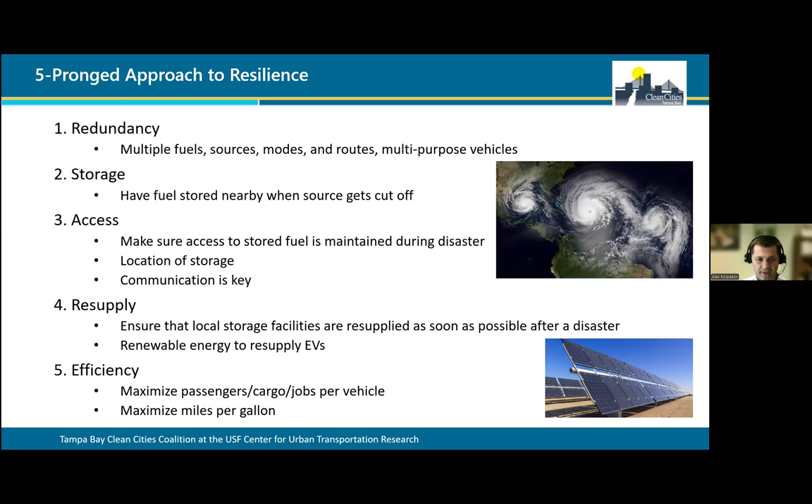And efficiency is when there is a shortage of fuel, you need to make sure that you maximize either the passengers or cargo per vehicle and maximize miles per gallon. So essentially, you try to use the fuel in the most efficient way when it's in short supply.

Now, this is a graphic representation of fuel supply chain for different types of fuel from production to the end user. So for example, for petroleum fuels, oil is extracted out of the well, then it's sent through a pipeline to a refinery, then it goes through a port on a tanker ship, then it's loaded into a pipeline or stored at a terminal at the port, and it's then delivered to retail stations by tanker trucks. So you can see that there are other types of fuels that can take different, sometimes much shorter delivery routes.

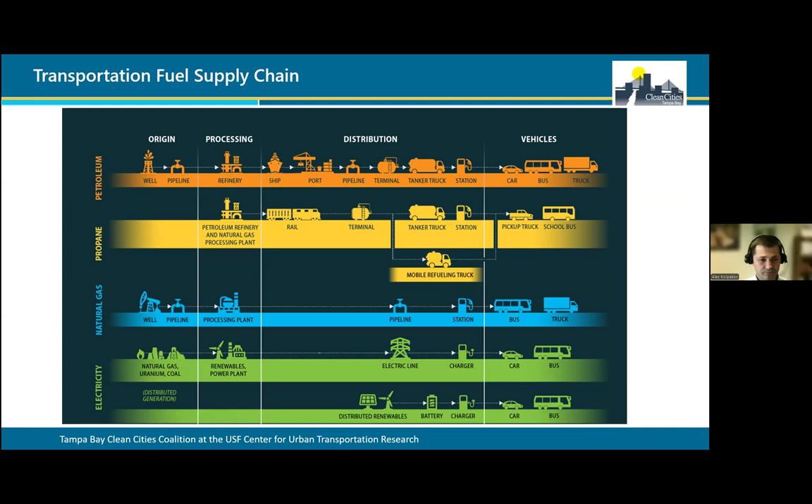Now, to expand a little bit about the different fuel types having different delivery methods, specifically in the case of Florida, all petroleum fuels, gasoline and diesel that comes to Florida is delivered to the state through Florida ports. Natural gas, on the other hand, is transported through a pipeline that can run above or underground. So one example is a Gulf Stream natural gas pipeline that runs under the Gulf of Mexico to supply Florida with natural gas from Alabama and Mississippi.

So natural gas supply chain is relatively free of choke points due to some redundancy in the system and due to the fact that it's not reliant on the port infrastructure. So there are usually multiple compressors that service the pipeline. In most cases, it's up to 4 compressors. So even the loss of one compressor will not reduce the fuel dramatically. It can only reduce the supply by about 25%.

Now, if you look at propane, propane is delivered to Florida by rail. It comes from usually Pennsylvania, West Virginia, Ohio. So one thing that makes propane unique and favorable emergency fuel is that it can be stored indefinitely. So unlike diesel and gasoline, it does not degrade when you store it. So with diesel and gas, you always have to turn it around, otherwise it goes bad. And propane tanks can be filled and stored for a very long time with little or no maintenance, and you can use it whenever you need it.

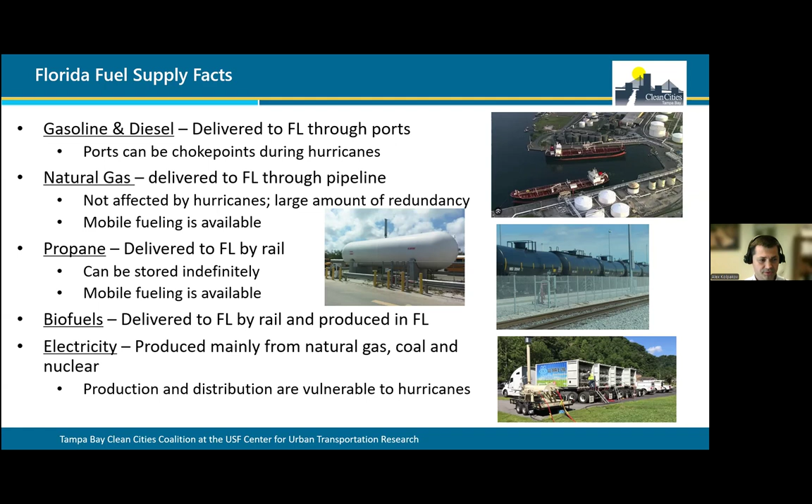Now, in this presentation, I'll mention some of the findings from the previous studies related to fuel resilience that Tampa Bay Clean Cities Coalition and CUTR was involved in. One was Tampa Resilience Study that was completed in 2020, and we looked at the role that alternative fuels can play in improving the resilience in the Tampa Bay area. So the goal was to collect and report data on fuel management and resilience activities related to disaster planning in Tampa Bay, investigate best practices and case studies of using alternative fuels, evaluate some vulnerabilities of critical facilities, and also identify the areas of improvement.

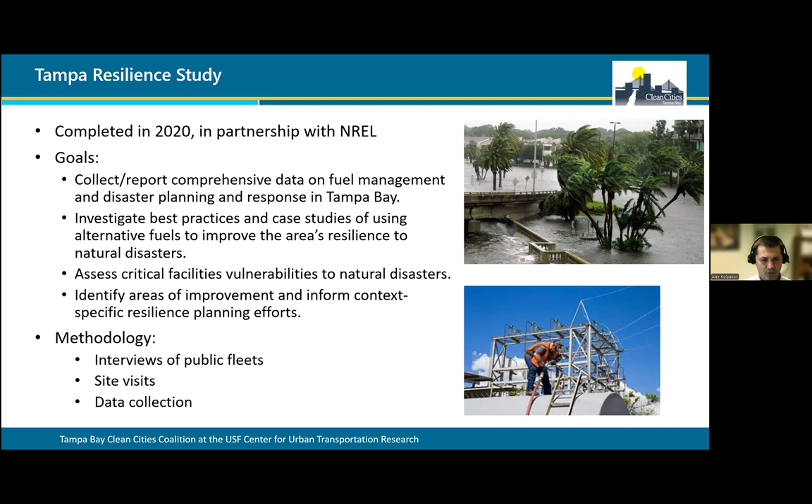So the way we approached it, we relied on multiple sources of data collection. We've interviewed public and private fleets in the area regarding their resilience practices. We conducted some site visits and also collected data on fuel shortage during Hurricane Irma, which was in 2017, and also the data on power outages during that hurricane from the local utility company.

So here are some of the major findings and best practices that we found from Tampa Bay. One is that ports can be choke points during hurricanes, particularly the Port of Tampa Bay is really vulnerable. That results from the whole configuration of the port and the waterways that lead to it. There is a 43-mile channel that leads to the port, and it requires approximately 4 hours for the ships to cover the distance. So that channel is relatively narrow and can accommodate only one-way traffic for mid-sized or large cargo ships. So due to the complexity of that port channel, large cargo ships are guided through the channel by local pilots.

And in case of poor weather, whether the hurricane is approaching or you have other high waves or just fog, pilots suspend the service and ships are not able to enter or exit the port. And the reason why the Port of Tampa is significant is because approximately 45% of all Florida gasoline comes through Port Tampa Bay.

Now, the second finding is that timing is critical to determine when normal operations should be suspended to prepare the fleet for hurricane impact. And this planning should be done every year to ensure coordination with local and state emergency guidelines. Now, asset staging, which essentially is relocating vehicles to higher elevation areas pre-landfall, is a key step in hurricane preparedness, and we found out that a lot of critical fleets are doing that.

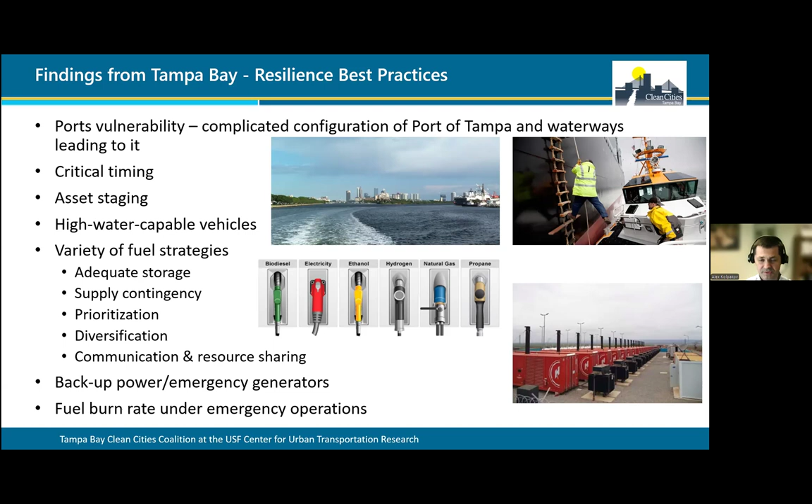Now, investing in emergency generators, including the generators that are powered by alternative fuels, is another important strategy. And finally, one thing that we've noticed is that accurately predicting the fuel burn rate under emergency operations is challenging. It turns out that fleets can consume up to 2 to 3 times more fuel during emergency operations than the normal operations, and it's important to be able to determine that fuel burn rate as accurately as possible. And sometimes it's not very easy.

Now, here are some of the results of data analysis regarding fuel shortages during Hurricane Irma in 2017 that we've done. The graph on the left shows the results of panic buying before the hurricane. You can see that 80% of stations were out of gas and 55% of stations were out of diesel 2 to 3 days even before the hurricane hit the state. We saw a similar situation before Hurricane Milton. In fact, about a day before the hurricane, most of the stations in Tampa Bay were out of gas, so it was not possible to purchase any gas.

After Hurricane Irma, half of Tampa Bay gas stations did not have fuel, and what we've also noticed is that diesel was more available before and during the hurricane compared to gasoline. But at the same time, after the hurricane landfall, diesel availability dropped significantly. It's not clear exactly what caused that. There could be two possibilities. One is that diesel could be the fuel of choice for recovery, so that's why it was in high demand right after the hurricane, or that maybe diesel supply was compromised. Again, we don't have enough data to determine what caused that.

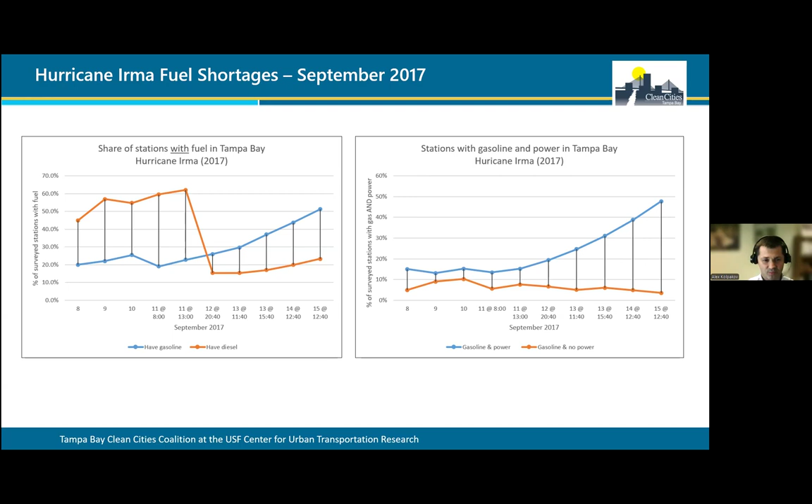The graph on the right shows the combination of fuel availability and power, because you need power to dispense fuel. And one interesting thing is that about 5 to 10% of stations had gas, but there was no power to dispense fuel. So essentially, whatever gas they had, it was useless because they could not use it. So this emphasizes the importance of having both fuel and power to ensure uninterrupted fueling.

Now, power outages create significant challenges for transit agencies with large battery electric buses. So while that large battery on the bus can be used to provide exportable power, and there are such technologies that allow that, the inability to charge the bus for a long time can result in a stranded asset, and that can be a problem. Backup generators usually are not capable of supporting the practical charging of battery electric buses. They can help with fueling the diesel buses, but not the battery electric ones.

Solar power is a possibility to have as a backup, but it usually requires a very large footprint and is often not independent of the grid. So if the grid is down, solar often cannot supply power directly to the customer. There are exceptions to that, and I'll talk about that a little later.

Some of the potential solutions to overcome those challenges is have fuel diversification, have different types of vehicles: electric, diesel, CNG, hybrid buses. Then one other thing that we've noticed is that some customers had multiple connections to the grid, or they would be located on different circuits.

So this may not be feasible for smaller customers, but we've seen cases for some larger customers like transit agencies where their transit facility would be wired by 2 or more circuits. So if one circuit is down, only part of the campus is out of power. In fact, I believe that JTA facility in Jacksonville is powered exactly the same way. They are on 2 circuits.

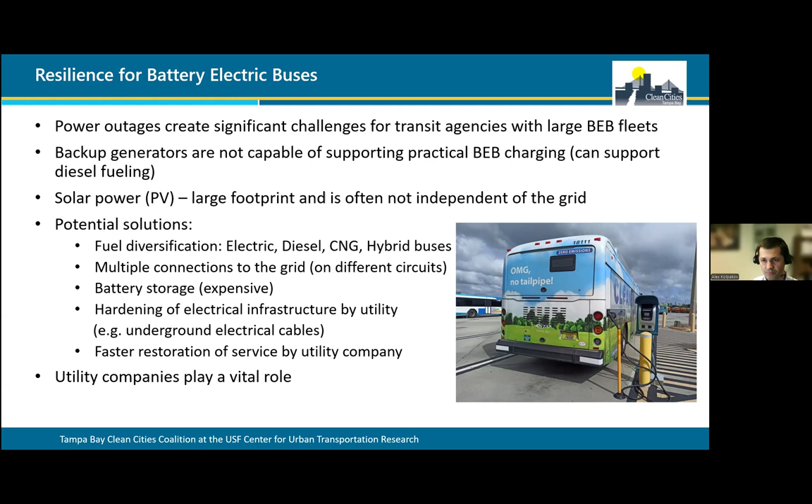Now, building on the experience with resilience at the local level, we've partnered with the Florida Energy Office, National Renewable Energy Lab, as well as the University of Central Florida in developing a state resilience plan. So the primary goal was to integrate alternative fuels into resilience planning practices in the state to improve the state's preparedness for hurricanes and other natural disasters. So this project was completed and published by NREL in December of 2022. So I'm going to go over quickly some of the findings.

So some of the lessons learned is that the propane and CNG supplies were not interrupted during past hurricanes, unlike diesel and gasoline. And while diesel and gasoline was not available from the ports due to port closures, propane and CNG remained available. We've seen cases where propane buses were involved in recovery efforts. They were delivering supplies and helping with evacuations. Some of the CNG users, such as City Furniture, sent their CNG vehicles to help with cleanups after the hurricane and also provided compressed natural gas to local municipalities that needed it. So that's the case of where the alternative fuel helped with recovery right after the hurricane.

One other thing that we would like to emphasize is the need to educate the first responders about alternative fuel vehicles and how to handle them. There was one example in Broward County, which was not necessarily related to hurricane, but still emphasizes that need for educating the first responders, where the propane bus caught fire due to an electrical issue, and the bus was parked in the bus yard. The fire department was on the scene very fast, but since it was a propane bus, the first responders did not know how to handle it, so they let it burn to the ground.

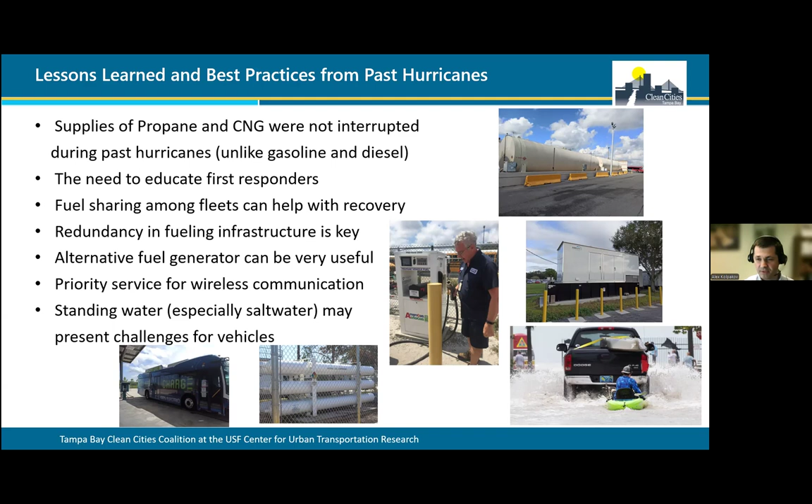One of the issues during emergencies is to ensure that there is enough fuel along the route when you want to ensure that the evacuation is available. There were multiple cases in the past when vehicles stuck in traffic during evacuation ran out of fuel, gasoline or diesel. But evacuation may be an especially difficult task for EVs given the limited range of the vehicles, fewer charging locations than gasoline, and also longer refueling time.

So as part of the Florida statewide resilience project, USF developed and tested the EV evacuation planning web tool. The goal was to assist in developing an optimal evacuation plan for EVs to avoid charging congestion. In that tool, the user provides the initial range or state of charge of the vehicle, the battery size, origin and destination, and preferred departure window.

And the backend algorithm determines what time to start the trip, what route to take, and where to charge on the way. That algorithm attempts to balance EV charging demand and supply by reserving charging time and EV charging capacity throughout the evacuation route. This is a prototype tool to demonstrate the feasibility of optimally scheduling long-distance EV evacuation in the case of an emergency. It was based on multiple assumptions, of course, but the idea was to demonstrate that it's feasible to do.

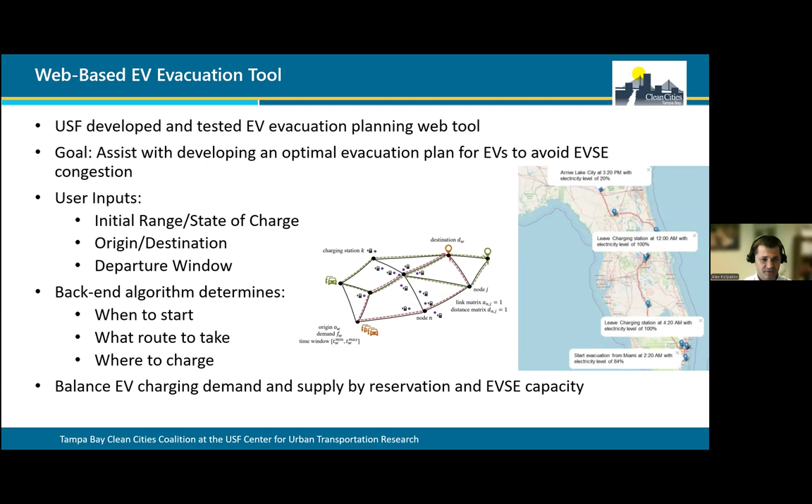Finally, I want to finish with some of the highlights from one of the recent hurricanes, Hurricane Ian, which was in 2022. That was the last one that we have complete data on. During that hurricane, the natural gas infrastructure in Florida was not compromised. There was little interruption to natural gas pipelines. Interestingly, there was a lot of flooding in some areas, but even some of the facilities that were flooded continued operating on natural gas. There was a case in Fort Myers where one facility got flooded, but the CNG meters continued operating, even fully submerged in water.

While natural gas supply was not compromised during Hurricane Ian, natural gas demand fell significantly. Natural gas is mainly used for power generation in Florida, not as transportation fuel. More than 2 million electric customers faced blackouts after Ian, and as a result, natural gas generation in Florida fell by almost 42%. That caused the decrease in natural gas demand.

Most damage during Ian occurred due to flooding, not wind. Carfax estimated that over 350,000 cars were damaged by Ian, mostly by flooding. There were 21 notable cases of EV battery fires in the aftermath of Ian, which I'm sure a lot of you heard in the national news. There was one case when a flooded EV caught fire in the garage and burned down the house. In fact, there was a similar case in Tampa after the recent Hurricane Helene, exactly the same, where the electric vehicle caught fire and set the house on fire.

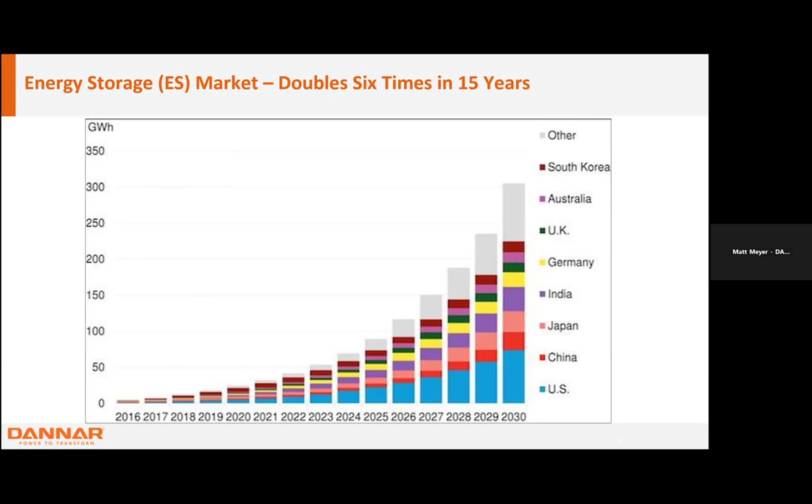Just a quick snapshot of where the energy storage market is. We all know this is a big market. It's a growing market, but when you see it displayed like this, I think it really can help us understand just what this market is. The energy storage market really is a derivative of this alternative energy buildup that we've been already in the midst of. And energy storage is kind of a trailing market that is in response to all of the needs that come from these alternative energies.

So again, we talk about resiliency as both preparedness and independence, and I want to kind of make this idea sticky. I wanted to make it a little bit fun. So I want us first to just recognize that we are using mobility when it comes to storage already in a lot of different ways. A couple of examples here. I could have used a dozen more, but it kind of helps capture the idea that storing energy makes sense for a lot of the same reasons that we do other things. So let me tell you a quick story.

When I was a young man, I was living in the Midwest in Illinois, and if a storm was coming in, we would take steps to be prepared for that storm, right? It was my mom's resilient response to news that a storm was inbound. And I knew it was going to be a big storm, a bad storm, if my mom would say, "Hey, Matt, go fill the bathtub with water and unplug the TV." You know, it's things we did in order to weather a storm or to be prepared if we lost power.

Similarly, though, in terms of the mobility piece of that, if we were going to travel to her family in Ohio, she would give me a couple of empty jugs. She said, "Hey, go fill these with water and grab a box of graham crackers, right? We're going to put those in the trunk." And that was to mitigate our risk when we traveled. We didn't have cell phones, and we were in our '64 Oldsmobile. And so that was a way that we added resiliency and we mitigated risk to our travel. But sometimes we just want to add mobility because we want the freedom.

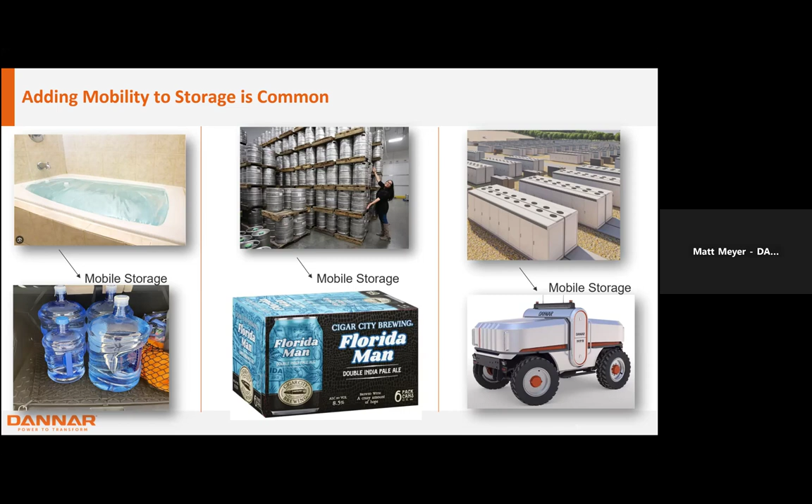And so again, for some of the same reasons and for the reason of trying to catch this idea and make it sticky, I want to recognize that energy storage is a big and important market, and adding mobility to that certainly has value. It's certainly going to have value when we're talking about planned events, and we'll look at that a little bit more, and unplanned emergency response, and that's where we'll kind of find ourselves at the end. And then specific to really the conversation today, there is this charging element, and Alex kind of touched on it there at the end when he was talking about the studies that have gone into what do we do for evacuation routes and getting people safely out of affected or soon to be affected zones by a big storm. Especially as the number of EVs on the road continues to grow.

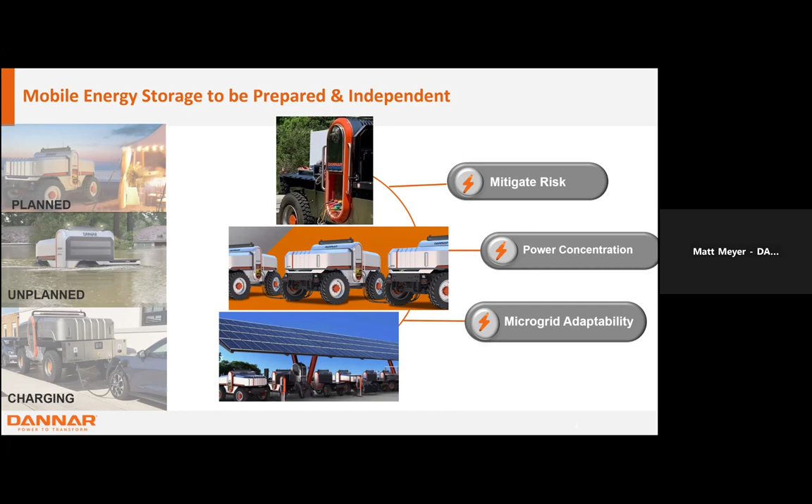So again, what I want you to catch here is simply that adding mobility to energy storage is going to help us mitigate risk. We're going to be able to concentrate power. Again, we'll get to that when we're talking about emergency response. And then as the world is looking to microgrids as the answer for generating power locally, using it locally, storing it locally, those solutions become more and more useful when we can add some flexibility and adaptability to that.

Again, I don't want this to be a big commercial about my specific piece of equipment, our mobile power station, but just as a snapshot, this is what we're doing from a power distribution, 120/240 volt, 3 phase. Today we're storing up to 0.5 megawatt on board. And in fact, we're taking orders already for 2025. That will be 600, maybe 800 kilowatt hours on board in the fall, moving us towards kind of the holy grail of getting 1 megawatt of power on wheels, which is where we're headed. We'll pair nicely with renewables. We'll talk about that a little bit more.

I wanted you to capture the picture there in the top right corner. That's a hydrogen fuel cell on the rear deck of the MPS as a range extender. So again, kind of pairing these new solutions together, where you think about hydrogen as being that good stored energy, and then the MPS in this case becomes the way we can hybrid that to the universal need for electricity. So some of the features there.

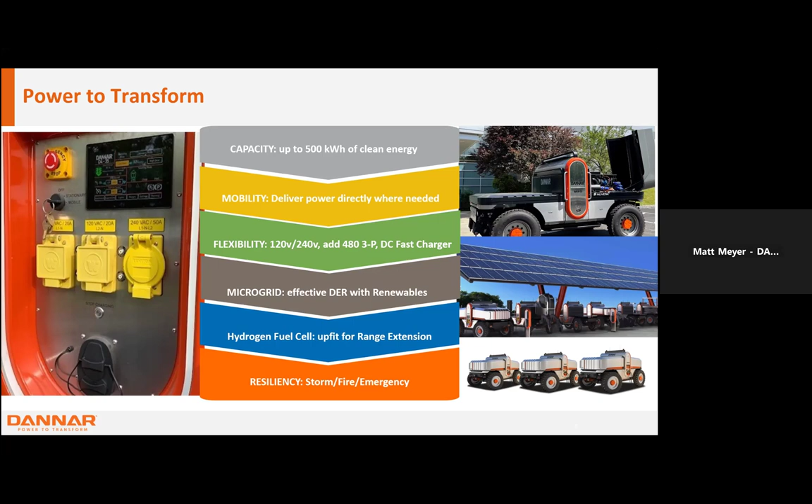So again, we'll talk about the planned, and then we'll end with just the slide about our unplanned and where we kind of fit there with emergency response. But I want to start here because it will kind of set up where we're going, and just think about all the ways and all the times where we're having stored energy for planned reasons, be it an event, be it down at the beach, or you're powering lights and a stage and a sound system.

Or another good example, Volvo just invited us out to their Volvo Days, their construction division up in Shippensburg, Pennsylvania. They had all of their customers and their big dealers in, and they're showing off their new electrics. And we were there to charge their electrics as they were going through their demos through the week, not just to provide them power and keep them operational, but Volvo has recognized us as an effective partner for their big construction contractors to use to keep their new electrics operational in the field. So those are just some ways that we're seeing markets kind of blossom up for us in these areas for planned power needs.

And again, I won't park here, but think about all the ways with electric fleets, like port operations that are moving to electric for material handling, how having a mobile asset to bring charging up and down the port would have tremendous value. So just for week in, week out, kind of mundane, regular work, a lot of reasons why, with all of these new alternative energy solutions, bringing storage and mobile storage with those is going to have value.